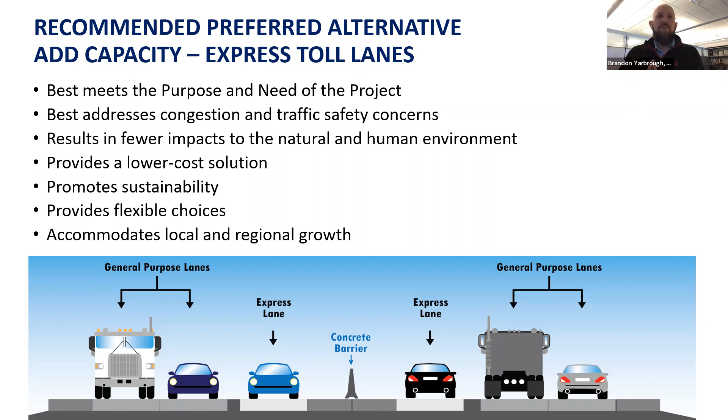Next slide, Robin. So what are the impacts from the preferred alternative when we look at it from an environmental and societal way? The project has minimal wetland impacts, less than 1 acre, and those will be mitigated through the use of a mitigation bank prior to construction commencing.

Right-of-way impacts, we do have about 15 acres of right-of-way acquisition. However, with that, we only have 1 displacement, and it's a residence on 167th Street.

And finally, we have no permanent impacts to recreational facilities, the parks, the trails within the corridor. We anticipate a de minimis finding from FHWA on all those impacts, and de minimis is just a fancy way of saying that the project will not adversely affect any activities, feature, or attributes of those recreational facilities.

So also as part of the environmental assessment, a noise study was conducted. That noise study was to identify the sensitive receptors and potential impacts to them within the corridor. And I think Cameron is going to walk us through that process right now.

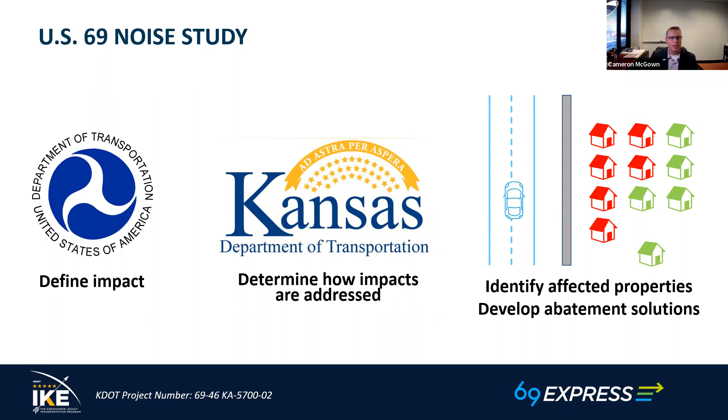I'm going to switch to the next slide. The first step in this process is to determine the existing conditions out there today, what the existing noise levels are, and then predict what we believe sound levels will become in the future as the project is constructed. The main tool for this is a very detailed software model developed by Federal Highway Administration, but it's always validated using field measurements to make sure what's being replicated in the model actually represents what's going on in the field.

So a series of field measurements are used to calibrate and verify the software model. The software model then takes into account project-specific elements like terrain, the distance between the roadway and surrounding properties, and the level of traffic on the highway. I'm going to go to the next slide.

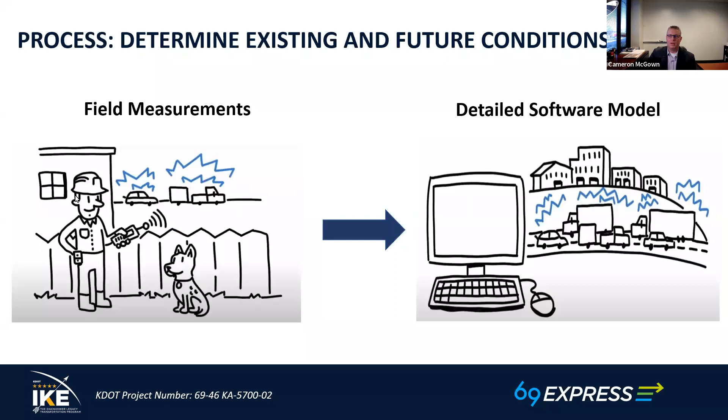Once the existing and future conditions are built into this model, we determine if various receptors, such as a home or other residence, are impacted. An impact can take a couple of different forms. First, are the existing noise levels already high? For residential properties, we look to see whether noise levels are at or above 66 decibels today, that's the impact threshold. Or, is the project predicted to increase noise levels by more than 10 decibels as a result of the project? If either case is met, that receptor is considered impacted.

What we found on this project, in the vast majority of cases, is the first criteria occurring—that the noise levels are already above the impact threshold. We've been able to verify, both with field measurements and the noise model, what people have frankly been saying to us pretty consistently: that it's already loud along US 69. Given that circumstance, this project is really the opportunity to do something about that and abate that noise.

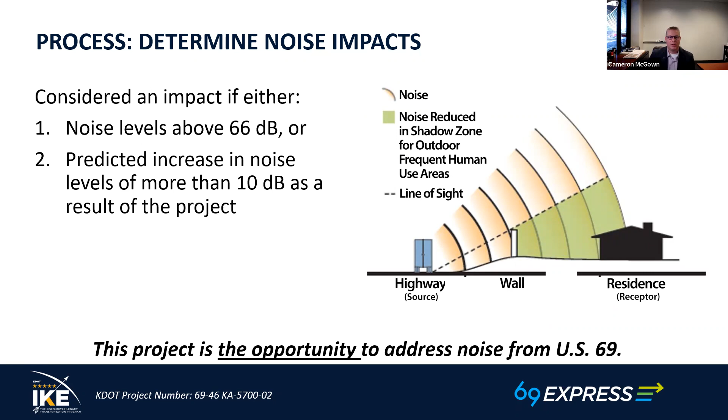So if we go on to the next slide. We know there are already impacts, but how do we decide what to do about them? The next process is to determine whether there are abatement solutions that meet criteria for being both feasible and reasonable or cost effective. A solution has to be considered feasible—it has to effectively provide a meaningful benefit to surrounding properties in a way that can be built and doesn't cause any additional environmental impacts.

That meaningful benefit we're shooting for is a reduction in noise levels of 7 decibels, or no less than 5 decibels. For perspective on human perception: a 5 decibel reduction is considered very noticeable, and a 10 decibel reduction is perceived as half as loud. So this target reduction of 7 decibels is really a meaningful benefit—that's what we're shooting for with feasible solutions.

For a solution to be considered reasonable, it has to be done in a cost-effective way. For this project, we're applying similar cost effectiveness criteria as previous projects in Overland Park on the 435 corridor and the US 69 corridor, which sets that threshold at 1,800 square feet of wall or less per benefited receptor. If it meets that threshold, it's considered reasonable and cost effective. Our team has been working to develop solutions that meet both the feasible and reasonable criteria for those considered impacted.

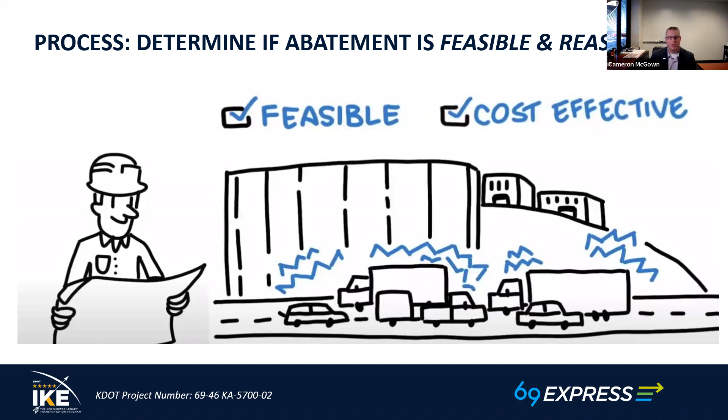If you look throughout the corridor, starting all the way up at 103rd Street down to 179th Street, we looked at a total of 23 noise sensitive areas, evaluating whether there were feasible and reasonable solutions at those locations. Of those, we're recommending a total of 14 different noise walls be carried forward for consideration and potentially for construction.

11 of those 14 locations are in areas where we're adding capacity in what we anticipate to be the near-term construction project, that being the segment from 103rd Street to 151st Street, with the additional 3 being recommended for future phases when capacity might be added south of 151st Street.

So from a cost perspective, if all 11 walls that we're recommending ultimately are included in the phase 1 project, this is roughly about a $30 million increase in the project budget.

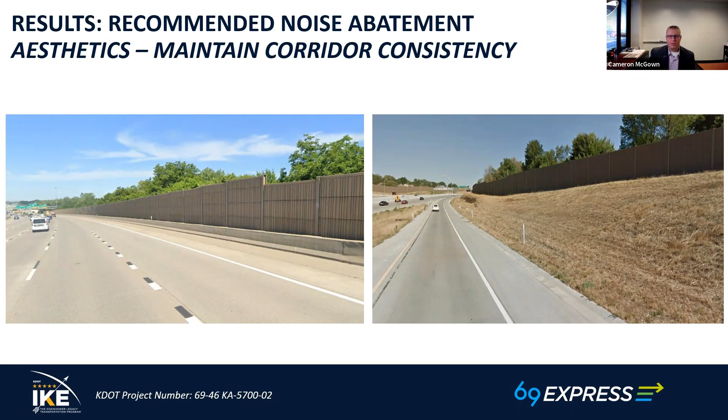The last step in this process, and ultimately what determines whether it'll be included in construction, is to actually engage with the property owners and tenants to see if these noise walls we're recommending out of the noise analysis are desired by those communities.

This is going to occur in a few different ways. First, we presented some of the similar information as what we just shared with you here. We shared that with the Overland Park Public Works Committee on November 15th, so all this information they have seen. We will then go forward from here.

We're going to present similar information at the public meeting coming up on Wednesday, and we'll also share some of this with the Overland Park Environmental Advisory Council on Thursday. So we have a series of discussions stacked up this week.

But really the big part of this is in January, we'll be hosting essentially 11 separate neighborhood meetings with the property owners and tenants in those locations recommended for phase 1. As part of those, we'll have the opportunity to meet with them and talk about how tall the wall is adjacent to their house, where we anticipate it to be located, whether it's up against the highway or against the right-of-way line, that sort of thing.

But there is also a vote of the benefited receptors, those that could benefit from inclusion of these walls, to see if they are desired. If 70% of the votes are in favor of the wall, then we'll include it in the project. So it's going to be a busy January as we engage with those communities along all the locations where we found noise walls to be both feasible and reasonable.

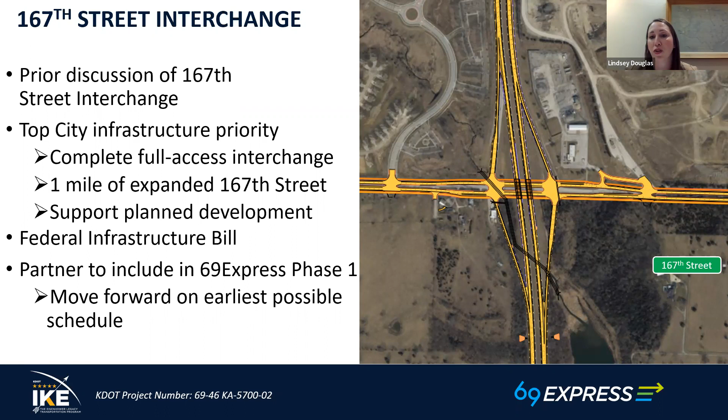Go ahead to the next slide. So this is the funding partnership we discussed with the city. We are putting forward $15 million in federal funds from the bill legislation, and then we will contribute an additional $5 million of state funds. We're increasing the Overland Park local contribution from toll revenues by $10 million. So it will be a total add to the project, taking it from $300 million construction to $330 million, with Overland Park's contribution being $30 million.

And what that does then with the actual length of time that the toll would be collected, we showed those two solid lines, right? There were the two estimated growth projections. The dark blue is the MARC growth projection. We did a very conservative growth projection just to give a range here, so we expected to meet that initial $20 million contribution.

We have added inflation to that, so we're looking at like a value now of 20 million. It would be about 26.1 by 2037 or 27.5 by 2042. So that's the base contribution. By adding this additional 10 million, we may be extending it out 3 to 7 years.

If you want to flip to the next slide, one unique element of this project that we wanted to make sure we shared with you all, and we've talked about this in the past, is that this project is going to be delivered using a different delivery model than what KDOT typically uses, which is called design build. It isn't KDOT's first design build. This is actually the third design build project KDOT's done. If you compare that across all the projects KDOT's ever done, it is a little bit unique.

The reason why KDOT selected design build as the delivery model for this project, there's a few different reasons for that, and the first really is cost. Design build can be a very effective way to control project costs, often as a budget target is set as part of the procurement. And then the competitive selection process really highly motivates contractor designer teams to price that project aggressively in order to win.

The second reason with design build is there's an opportunity for the contractor to manage certain elements of a project where there's challenges for the owner to control. I think the best example of this is really utility relocations. Oftentimes the exact locations of utilities are hard to determine ahead of the job, and sometimes you don't uncover those things until after you start working on the project. So putting the design builder in control of how those relocations are scheduled, how they can mitigate or avoid conflicts at times, it often results in fewer utility-related expenses and utility-related delays during construction.

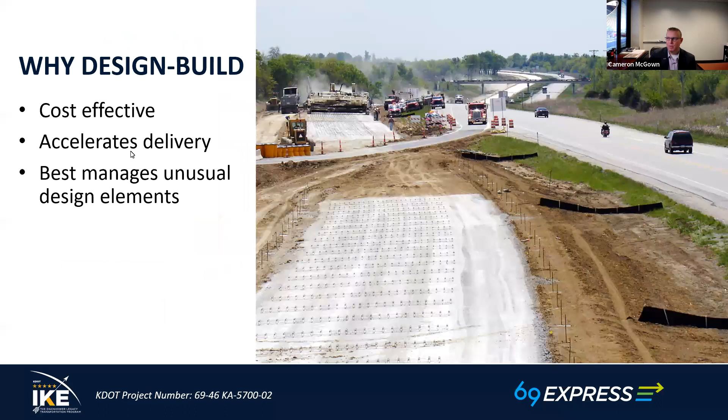Also, that area immediately just to the west already does have noise walls that are mitigating the noise that's on 435 and the CD road where that'll connect. You've got some additional questions, I can dive into that a little bit more, John, and talk about that with you if you'd like to kind of understand a little bit more about what was modeled there.

Well, I was thinking though that I don't know if you're doubling the traffic going that way, because you've got the southbound 69 that's already going that way. And so you're adding a lane that could have, I'm just guessing, maybe double the number of vehicles going that way, or at least that's an estimate. And so it seemed like that might, and it's also elevated, so you may be getting more sound, although I'm not quite sure if it's going to be going down or whether it's going to be up at an angle. But anyway, I would have thought that there might be something needed there, but so that was my question, really.

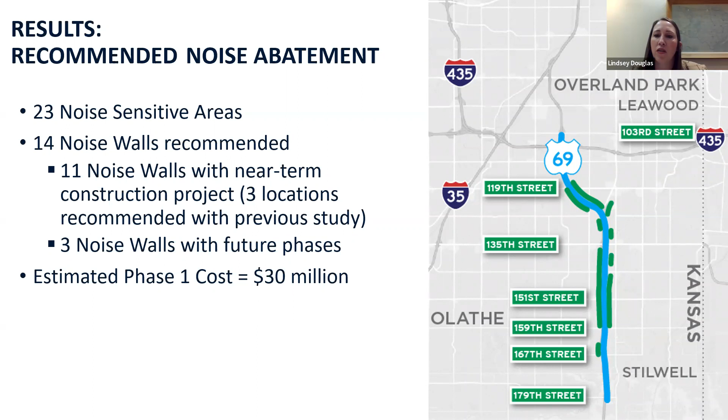Is there an opportunity to clean that up, and also discuss a bit more about the neighborhood group we're working with? Sound Off 69 was a group of neighborhood associations that kind of came together on the west side of 69 and south of 135th Street.

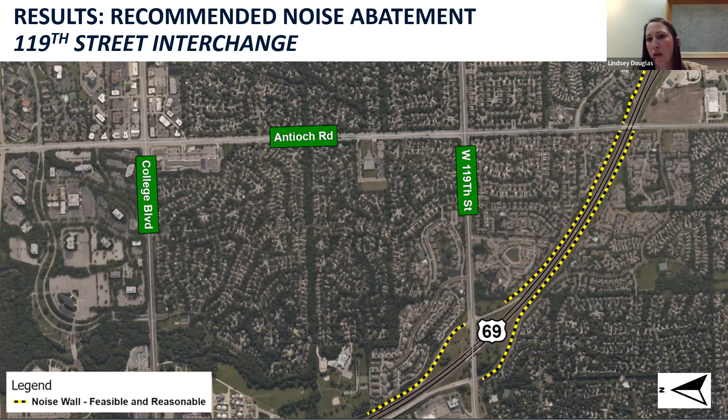Is that right, Cameron? That's right. Yeah, it was a group from 135th to 151st-ish, that whole grouping, again, as Lindsey said, mostly along the west side. So those associations kind of came together on their own.

We've had a couple of meetings with them, and some other discussions with a couple of other neighborhood associations. We've had a lot of conversations with neighborhood associations. We met with Tallgrass, and some of the homes associations just south of 119th Street on the west side. So yeah, lots of interest on this topic, but they have not seen these results yet unless they happened to attend the Public Works Committee meeting on November 15th.

So this is very fresh information for you all to be seeing, and we have not, as Cameron said, communicated where the walls are recommended to any of the neighborhood groups. That information will be coming out, and as Cameron talked about, we're going to be meeting with those folks, inviting individual receptors to meetings, not just their neighborhood association leadership.

It's actually the receptor, so the homeowner, who is going to get to vote on whether or not the walls should be constructed. So we're looking forward to those conversations and moving forward with whether or not those are going to be included in the project. Getting that final scope identified is really important as we're trying to stay on schedule.

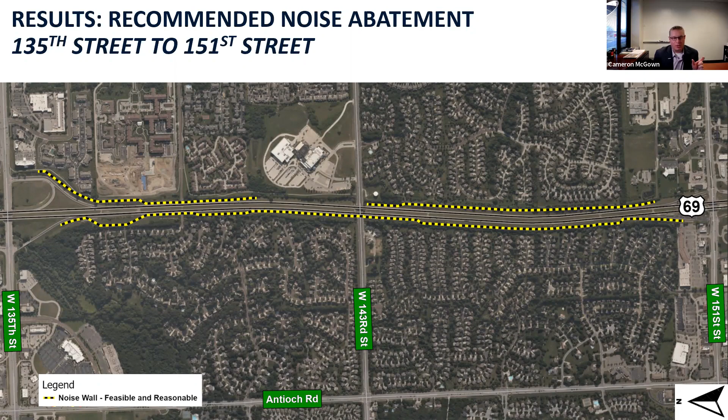Cameron, I don't know if you have other examples of specific safety locations and how this project will address them. Yeah, I think you hit the high points. If you dive into the safety analysis we've done, the big two hotspots are the segment between Blue Valley Parkway and 135th Street that Lindsey mentioned, and then the other hotspot is between College Boulevard and I-435, that short stretch through there.

And just globally throughout the project, as a result of the improvements being suggested here, reductions in congestion will go a long ways towards improving the accident rates that are out there, but also improving the entrance and exits, the way they're configured to have continuous auxiliary lanes between interchanges so the merges aren't so concentrated and causing rear end accidents. That's something being applied globally at all the entrance and exit locations. So it's a combination of more capacity, but also improving those entrance exit configurations, that will go a long ways towards reducing predicted crashes.